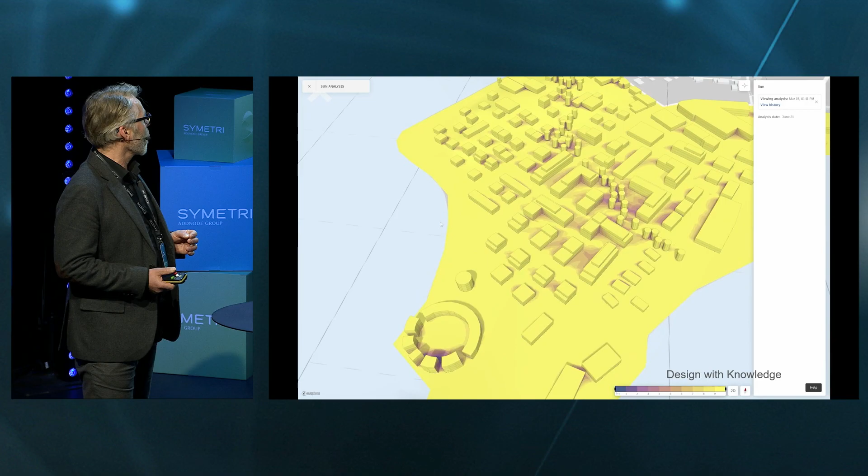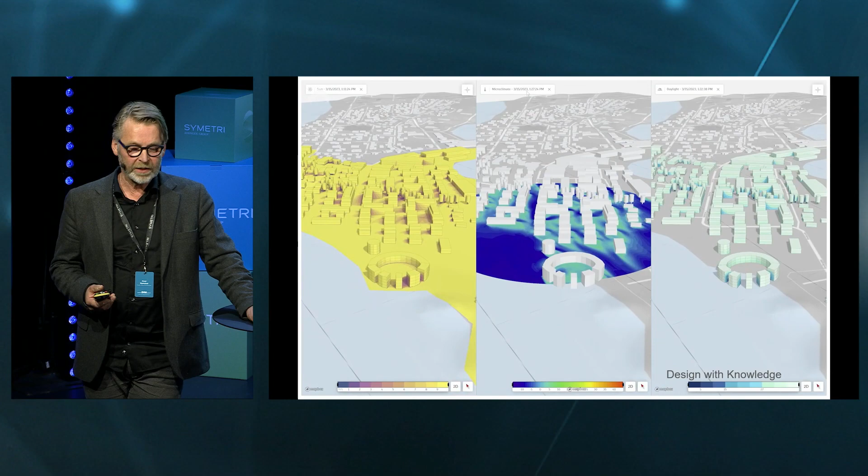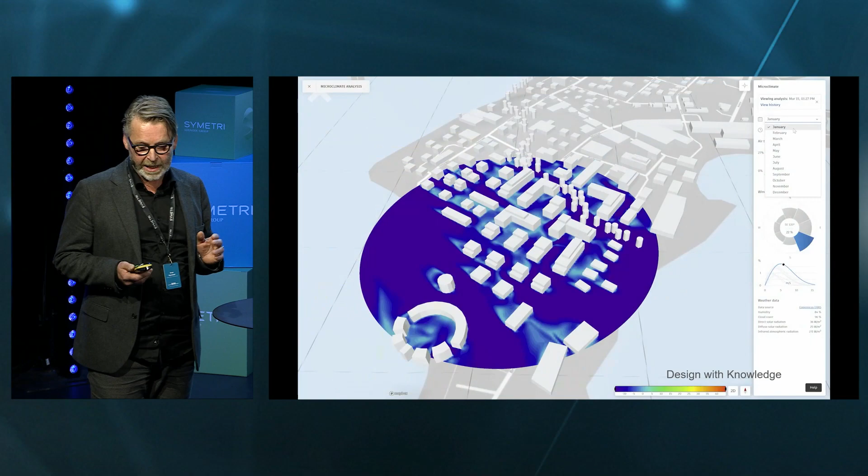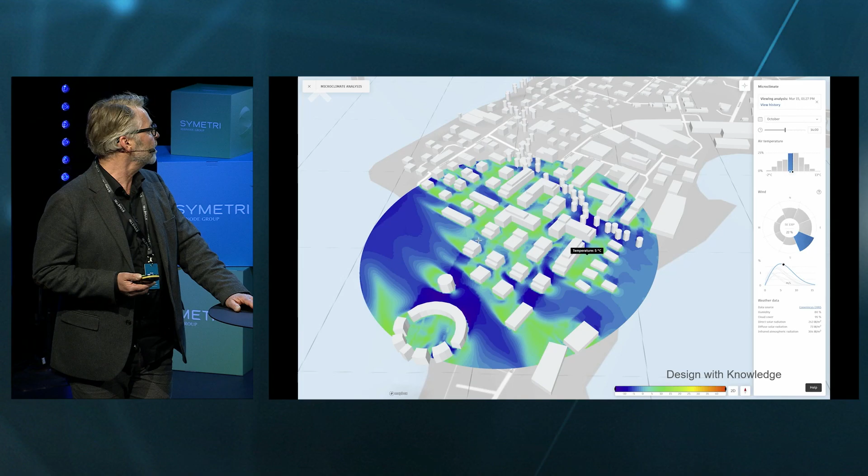Okay, so how do we work? From early phase, we believe in design with knowledge. In recent years, we've got access to intuitive and powerful tools that enable us to investigate the potential of a site. We've been using SpaceMaker for a couple of years to really get deeply into the potential of different sites. Being able to study different design alternatives on the fly is really powerful, because in the early phase, all the important issues should be addressed.

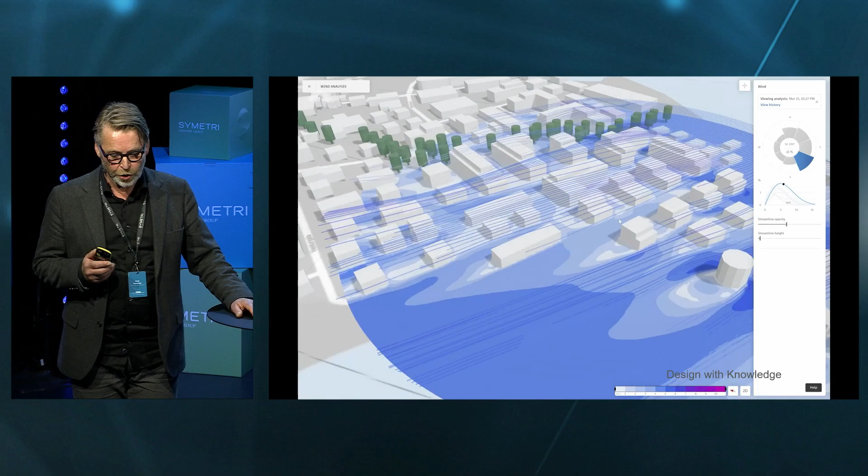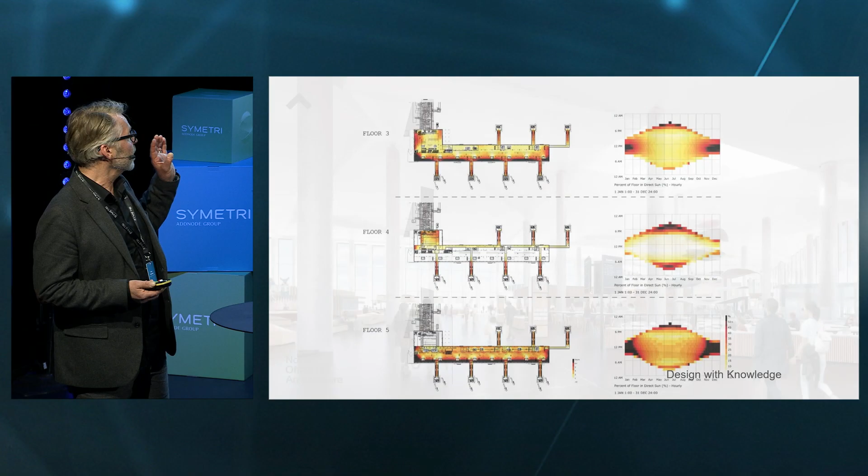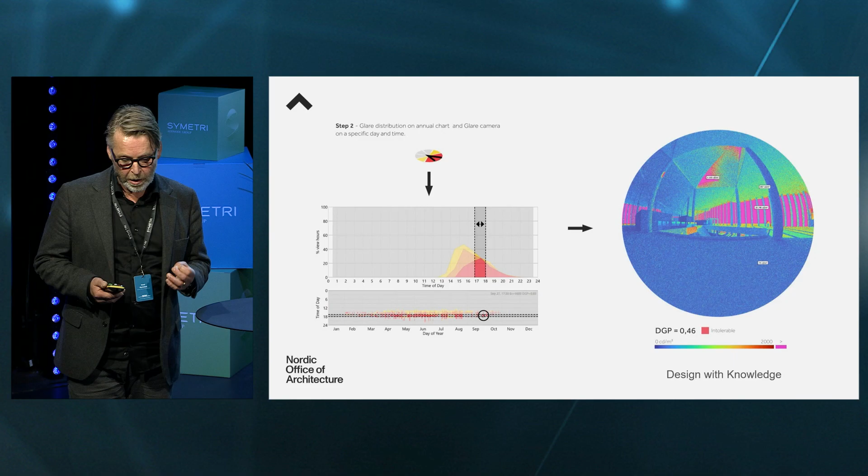We have this SIM group supporting our design teams, and they work with different kinds of advanced simulation as well, not only SpaceMaker, but like daylight studies, glare studies on Keflavik, where we have really powerful tools to go deep into the different design alternatives and evaluate them.

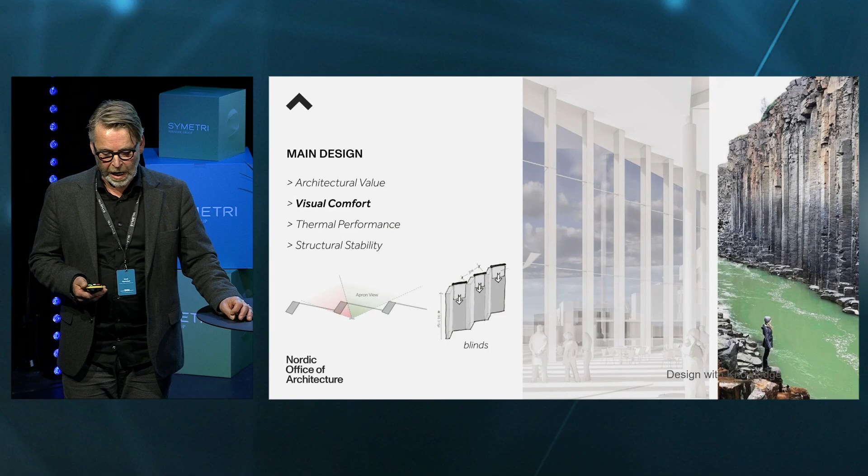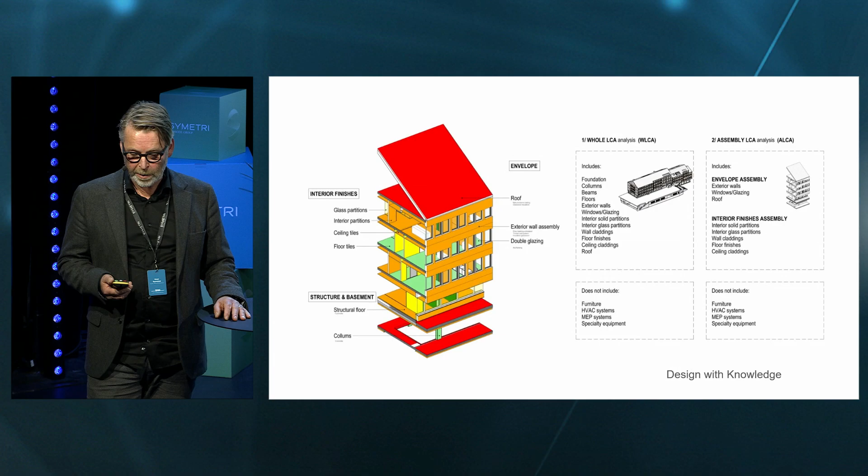We're using Climate Studio, Ladybug tools, and other specialized simulation tools. And this is One Click LCA, which has become a tool now for some of our projects, which is really important to get a grip of the embodied carbon footprint of a building.

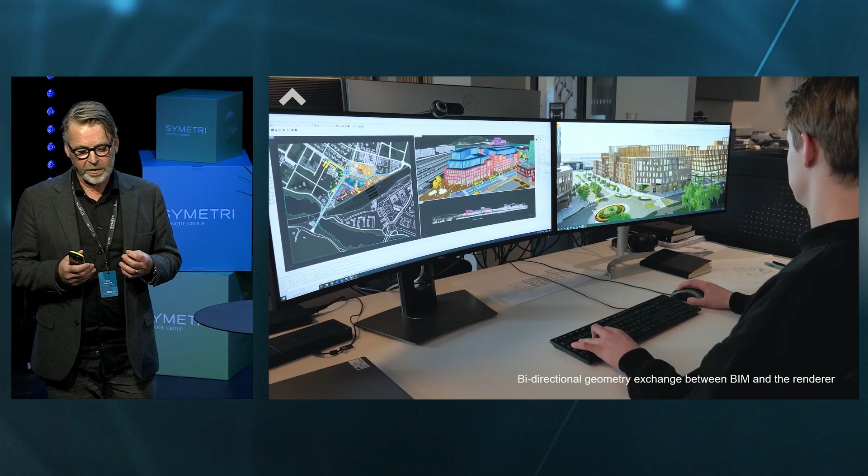There's been a silent revolution out there, and the way these immersive real-time tools are intertwined and linked to the BIM models is a big revolution. We see how this improves collaboration, improves cross-discipline work, and we know the building in and out. Having those tools as standard for many of our architects means you don't need special expertise to do this.

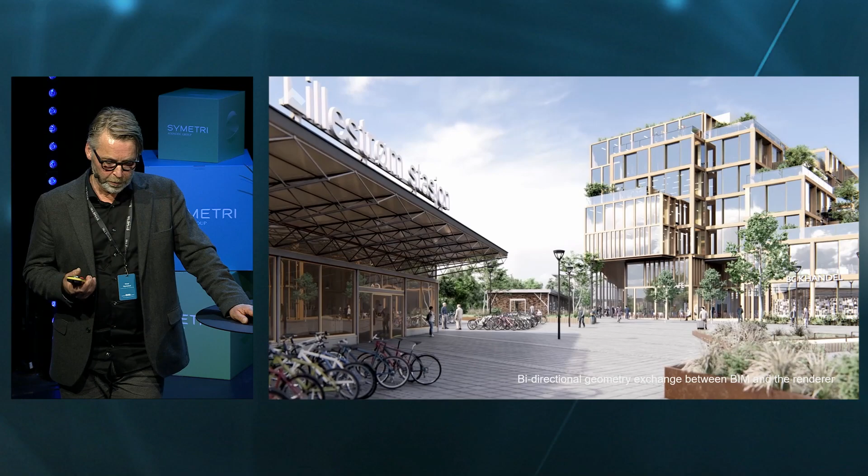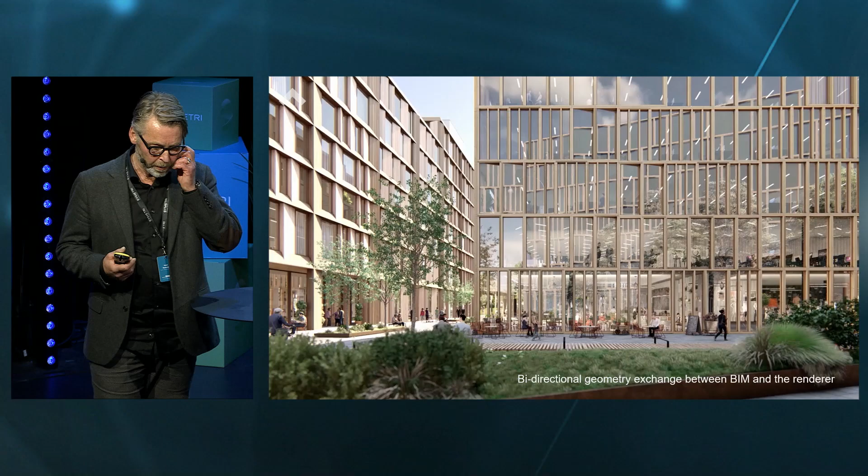So we've been able to produce a lot of visuals, content that we can use in communication with municipalities, like here at Lillestrøm. We will see the enormous power of having updated models. These are not artist's impressions - these are what's on the table for the design team. So we strongly believe in that capability for all the design teams.

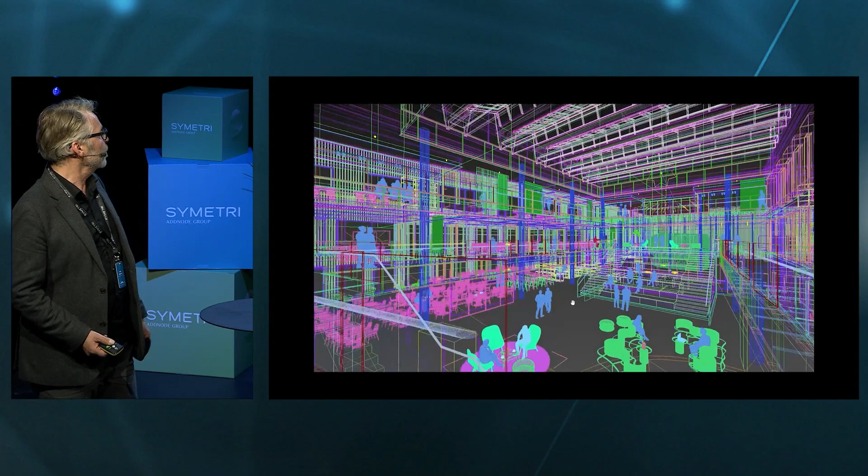And the revolution in computational power, the evolution of GPU, CPU, and cloud-based 3D rendering is enormous. This is real-time Corona rendering, and I'm actually building this image now. So you can sit together with the client and work with the lighting concept, work with the model, which is quite a revolution.

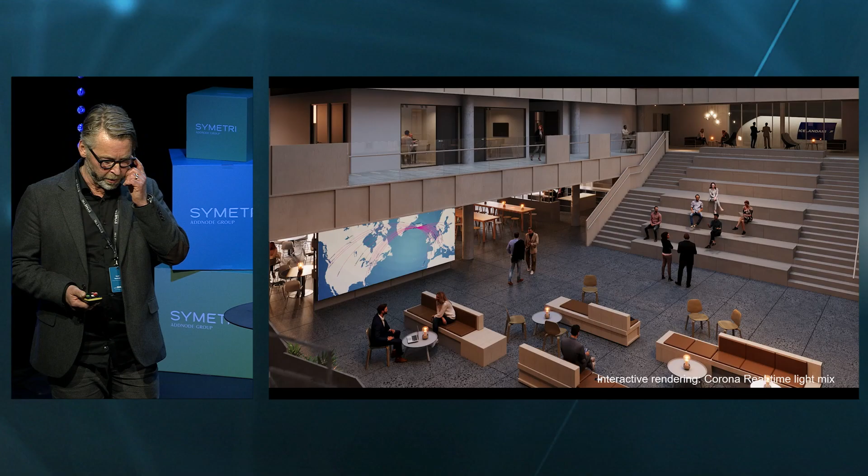And we see that the quality of the architecture is improving because we know the building so well, and we have complete availability to all the different aspects. We are working with immersive VR in quality control. This is the new government quarter, the art integration in the A block. And by using this in cross-discipline collaboration...

Everyone, regardless of background, has a sense of scale, dimensions, sightlines, architectural quality, orientation, spatial relationship, and they see this in a quality not seen before.

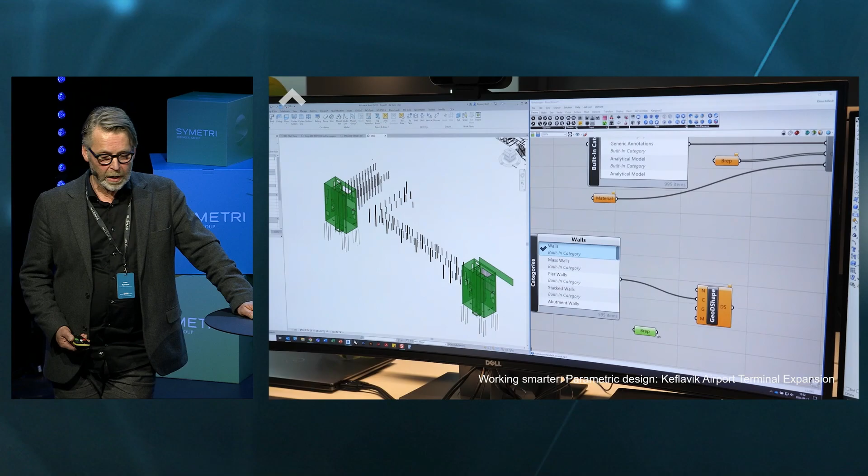We also do a lot of development of tools. We're trying to work smarter in every new project. We define new ways of working. We have been collaborating with different developers like Spacemaker and Parallelo, among others. And we also have a very strong relationship with our parent company developers from Norconsult.

So how do we invite our clients and users into this? We are experimenting with AR now in an infill project in Møllergata. We strongly believe in that technology.

We also strongly believe in the way we can invite users and different stakeholders. This is Stavanger Universitetssykehus with a VR cave. We see that these tools enable us to facilitate the user process in a much better way because everyone sees the exact same thing and everyone is included.

We also experiment now with having kids into the discussions so that we can communicate and allow for feedback from user groups that are normally not heard.

And obviously we're doing animations, old school animations to describe the quality, the architectural quality of the project. This is a new government quarter. We're doing everything in-house, especially in projects like this. So these are actually depicting the project as is.

So, Bridget, now we're going to go deeper into how we can work and how we should work, and dream a little. Thanks, Knut. So we've heard a little bit about the industry problems and how Nordic and its digital strategy is trying to tackle some of these.

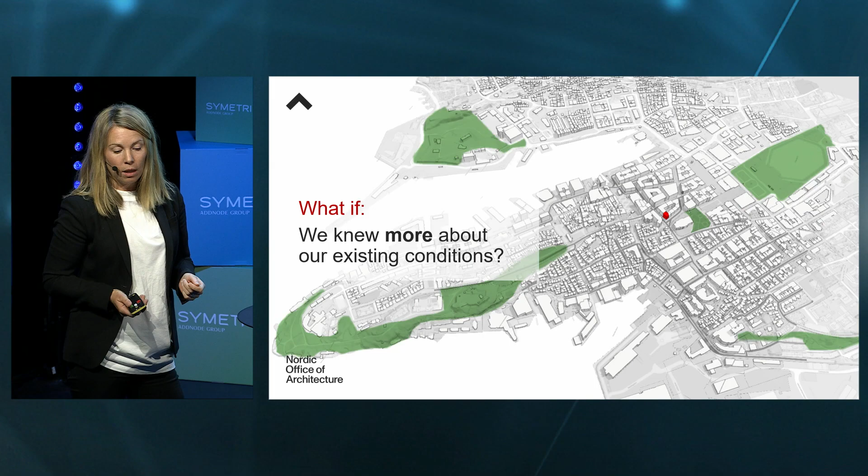So what if, in our workflows, we knew more about our existing conditions? I'm talking about the connection of external data into our digitalized existing conditions and our native design environments. Here, we can understand the wider context with data that's already being produced, such as amenities, educational facilities, transportation, green spaces, demographics, or the availability of reuse elements in demolition or rehabilitation projects. And this is all in our native design environment, putting the tools in the architect's hands.

Some really nice advances in technology or initiatives here include the Bodø Kommune with their digital twin, a visualization of data in a twin environment; Nordeca, who are collecting and visualizing a lot of really nice data; Material Mapper, and also harvesting information from Google Maps. If we could customize this information for our own projects, this would benefit us in understanding where we are in a wider situation.

And what if we could have contextual presentation illustrations produced simultaneously? There would be a closer tie between production and visualization, whereas here it is completely disjointed.

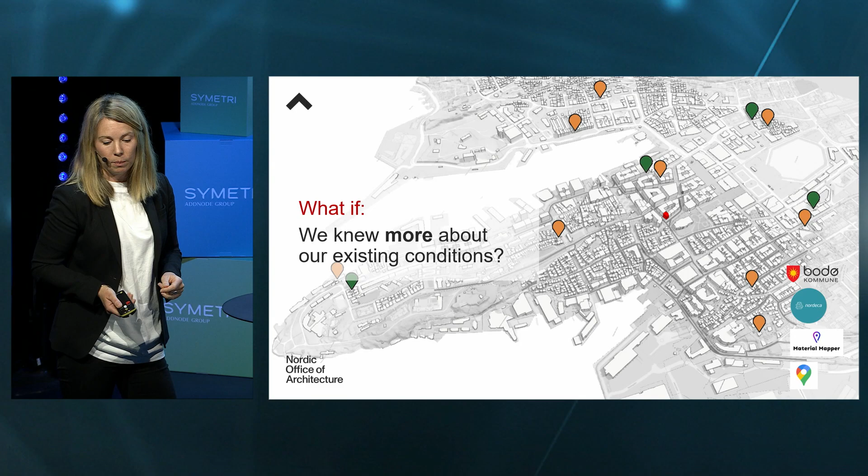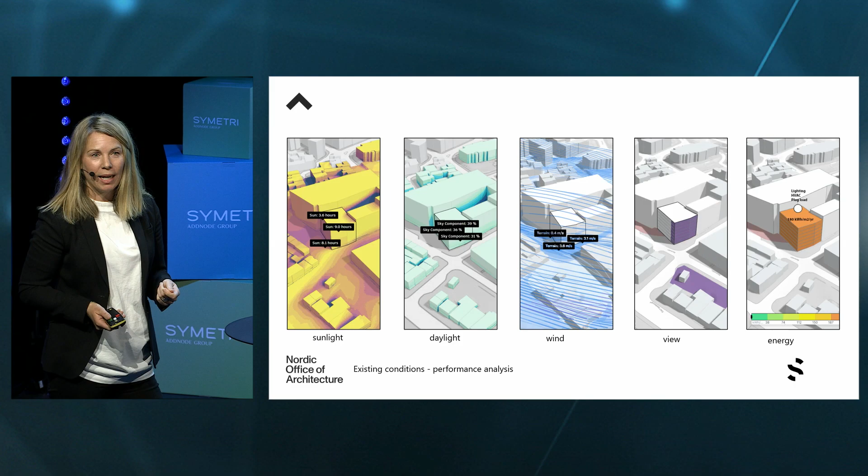So what if we had a better baseline of existing performance analysis? The same as Knut has shown, but in every project. We need an easy interface, visual feedback, such as SpaceMaker for simulations. This could give us a better chance to make performance-related design decisions in early phases. We're more likely to retain and improve more of the existing and improve the rest. So we know the performance of what is there. Commonly, these projects are demolished without analysis.

What if in our early phase workflows, we had the accurate digitalization of the existing conditions? This sounds really trivial. Point cloud technology is not new, but it's still not being done in many of our projects because we come in too late to influence either the development or the purchasing of the point cloud. What if we could have a scanned data bank which made it easier for us to harvest this information rather than having to order new point clouds all the time?

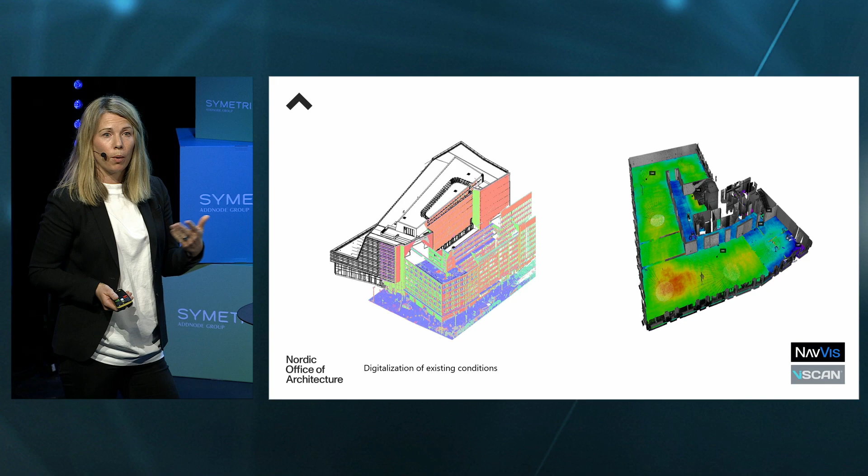And not only having the point cloud, but actually analyzing it so that we know the existing conditions. Let technology tell us about the data. Even better, let's let AI automate the creation of existing geometry. These tasks are taking us away from our design work, and some really nice advancements here are with NavVis and VSCAN in the automation of geometry from point cloud.

I'm really happy to have an expert in my team because this technology is new for us, but it's so essential that we understand what we're getting.

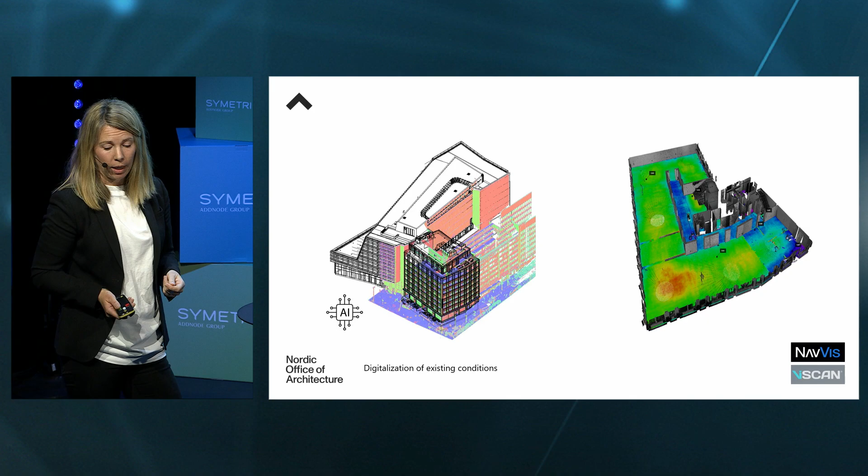The mandatory mapping of elements for reuse is coming, but what if we digitalized it much earlier on in both rehabilitation and demolition projects? And it could be data or data and geometry. Here, we could either feed that back into a system by donating it or absorbing it in our own projects. Then we could make design decisions based on the availability of resources. We're happy to be working with Materia and Twin Solutions, some really nice advancements in technology here. So we're really excited.

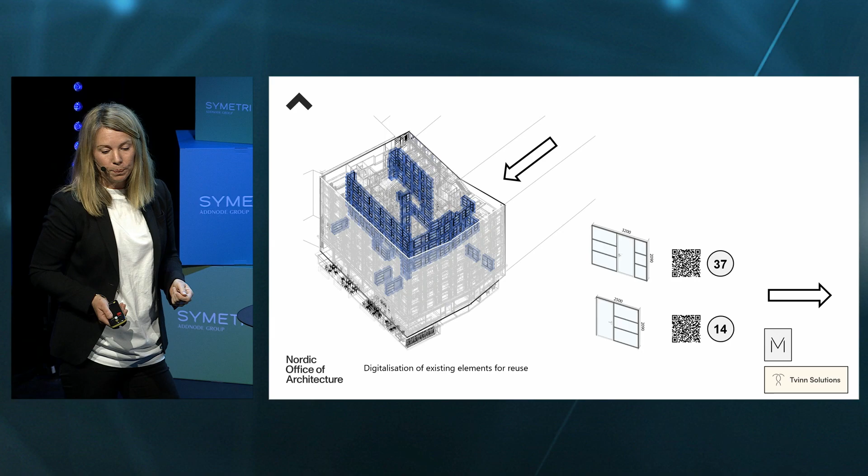What if we knew more about our designs themselves? In my dream, we have technology that automates monotonous and repetitive tasks, and we have more time to understand and optimize our own designs earlier.

We've got the clients on board that evaluate more than just cost and program. And here, with a connection of data such as EPDs, material passports, price, locality, reuse elements, or the use of algorithms to calculate waste, this would all be available in our native environment. So it would allow us to pull data from wherever we needed and optimize or assess our designs in a way that we're not doing right now.

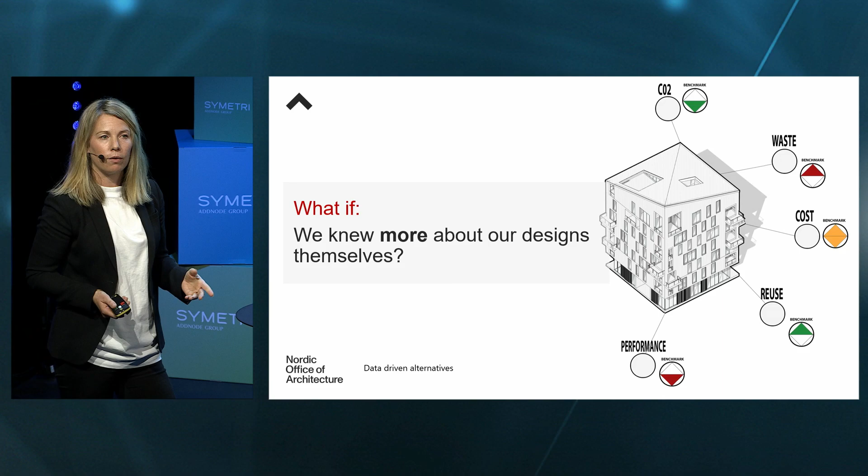When we talk to contractors, they tell us that they come in too late to influence the choice of materials or the amount of waste created from our configurations. But what if we brought them in earlier in a consultant-based role? They know a lot about waste, but we're not using any of this in our early phase design environment.

Here, we're relying on structured data, visual feedback, and the ability to compare. It needs to be user-friendly for all architects, and we're hoping that these new workflows could avoid greenwashing, which happens in later phases.

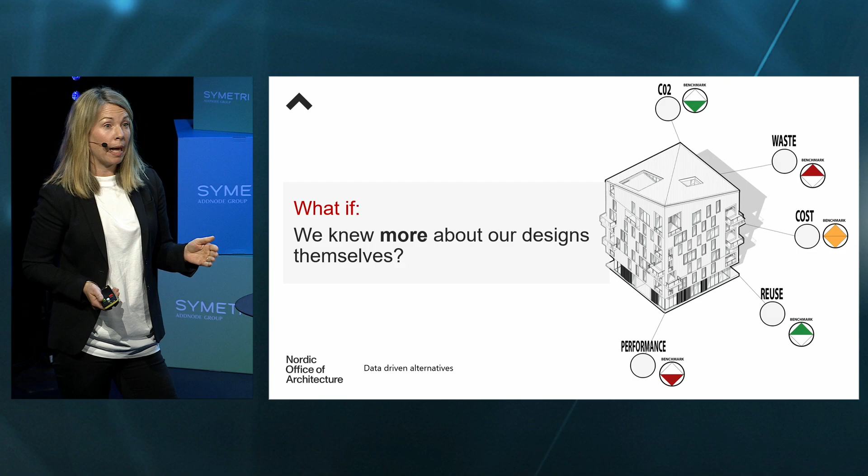So what if we understood the impact of every project? Raise the bar a little, just to get started. This connection of data could allow us to have impact as an active factor in the evaluation of our design alternatives. For example, the total CO2 emissions.

And what if it was done even if it wasn't asked for, because it was so simple and convincing? We as architects could become the drivers for projects with a lower impact. We're so happy to have Norconsult on our team, who have developed an early phase connection to CO2 information, which is super easy and visual if we create the right filters, and one-click LCA for the later phases.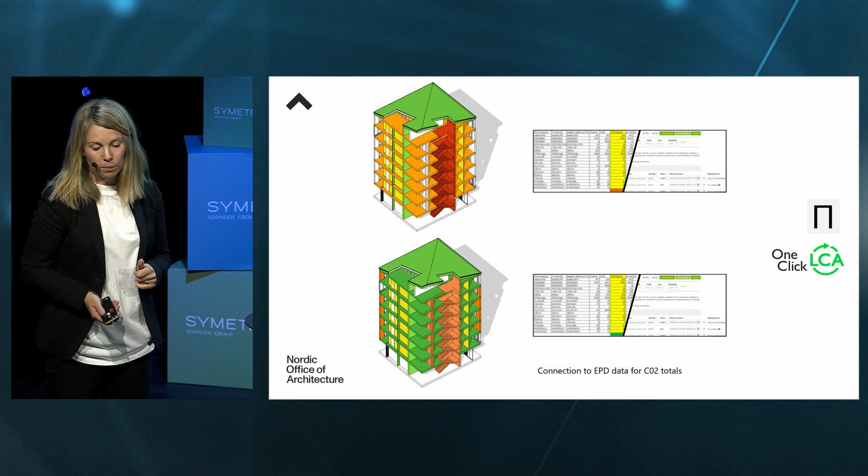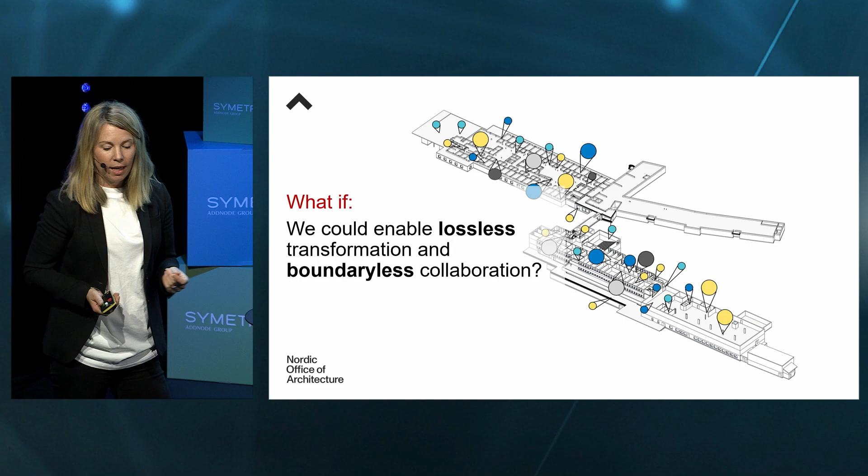What if we could enable lossless transformation and boundaryless collaboration? What if the project environment could be a smooth series of handshakes and high fives, that there was actually one source of truth? What if we could use technology to facilitate better digital cross-discipline collaboration? And I'm not talking about separate files as links, but the transformation of geometry and data. Importing and exporting would become obsolete, and all types of data could be harvested: documentation, imagery, status.

It was really interesting hearing from Teo. I'm excited about the way Autodesk is going too. So yeah, the industry is headed in the right direction, but it still feels like the era of the workaround. And I encourage you to visit my colleague Christina's presentation tomorrow. She's going to talk about a project that advanced a little in collaboration across the globe.

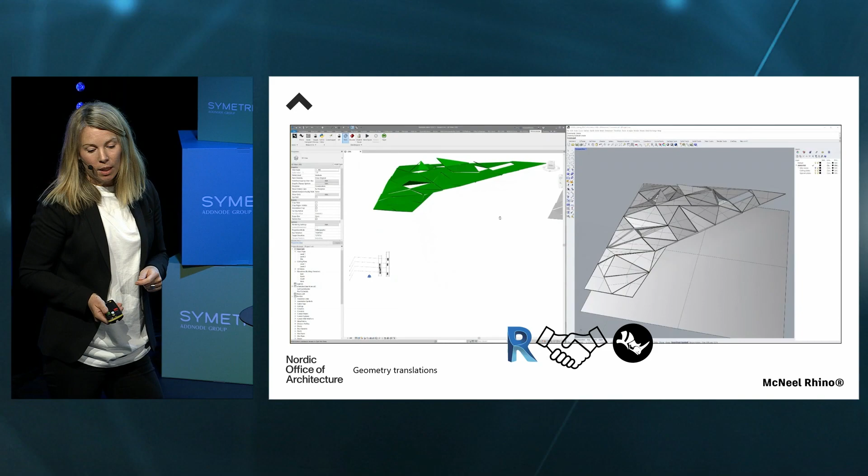So some interesting examples of where the industry is headed in this direction and the lossless transformation of geometry. Here we've got Revit and Rhino operating nicely under Rhino Inside or McNeel Rhino. Architects can use whichever program that they need to achieve the desired design goals without compromising, and one software acts as a host. And this is my clever colleagues that are working on the Keflavik airport.

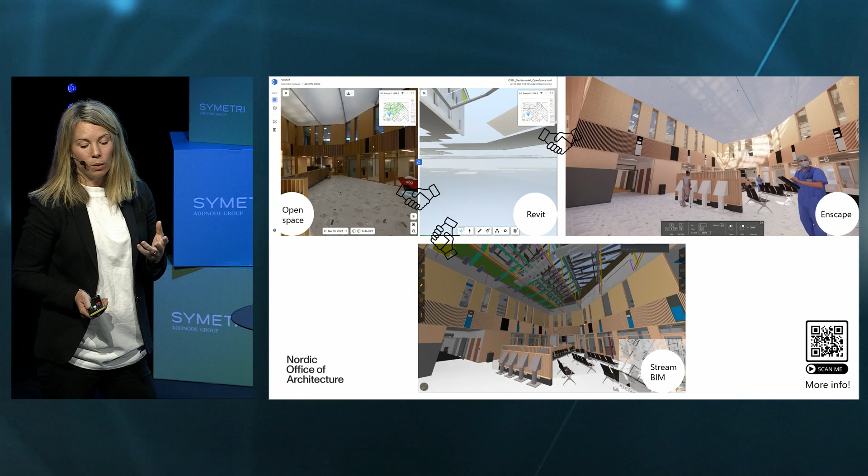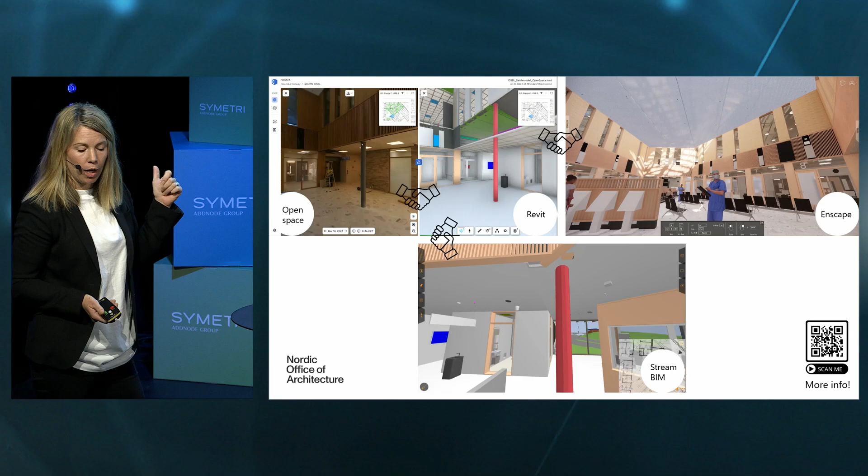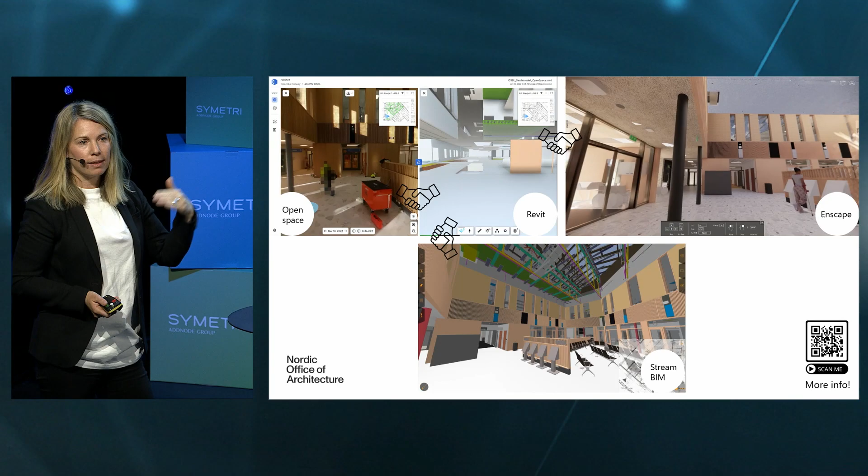Another interesting example is the interoperability of these four softwares in the Oslo Storbylegevakt project. They're using Revit as a native design environment, Stream BIM, which hosts the models and all the data. They're using Enscape for visualization, and OpenSpace for the site photography, which is a really interesting program. It takes imagery on site and connects it back to the BIM model. And it also uses AI to track the status of the building on site, which is really interesting.

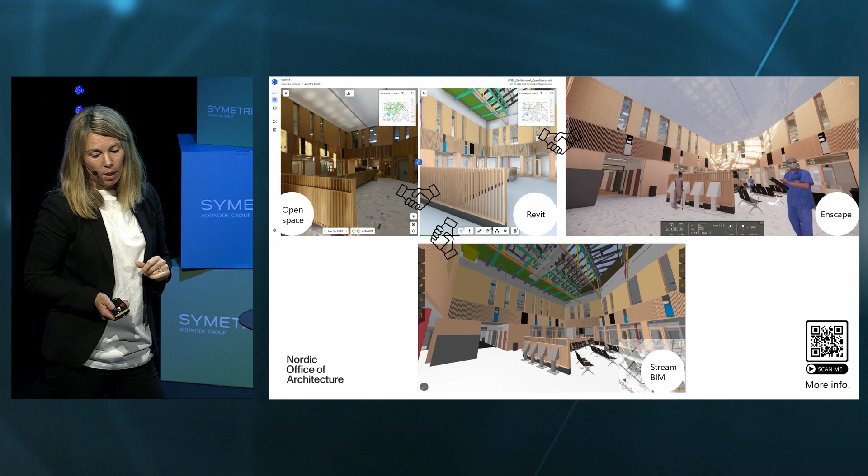But there's still a level of fragmentation in these workflows, but it's much better than the norm. What if we could have all in the same system? Here, there's several exports that create this workflow. It's a really great project to take a look at, so I encourage you to take a picture of the QR code, and there's a nice video that sort of talks a little about their collaboration.

So what if we could design our projects' futures from their pasts? One hot topic here is the digitalization of circularity. But what if we knew what was available, how much, when, where? We're much more likely to incorporate reuse elements in our projects. So if the system was a series of digital handshakes from start to finish, from the extraction to the reuse in the next project, this could enrich the stories of future designs, or it could be a catalyst for design concepts.

A nice example is Empower, that works with the circularity or the digitalization of the circularity of plastic. They actually embed a story in the final products, and you can see where the plastic has come from. And I think that's really rich and really exciting. But if we're going to get this to work, we're relying on collaboration, knowledge sharing, and structured data through the whole value chain.

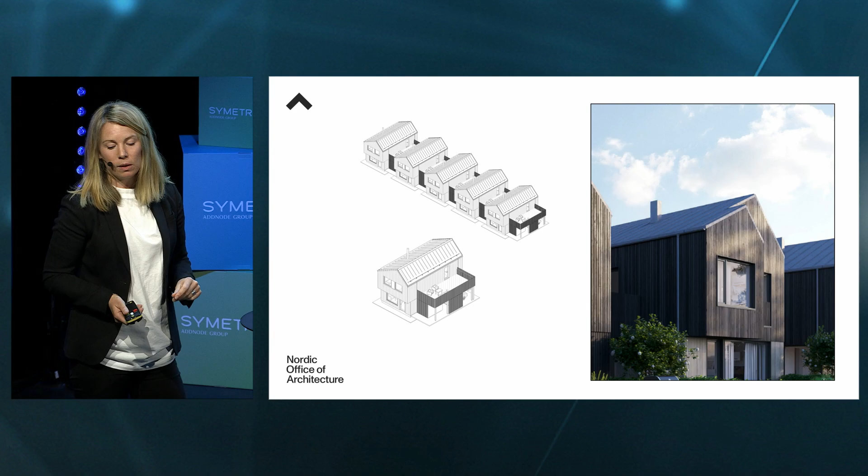What if we go one step further in our new builds for the digitalization of design for disassembly? Here, pulling inspiration from Europe, in our design, we could actually design our project's potential future.

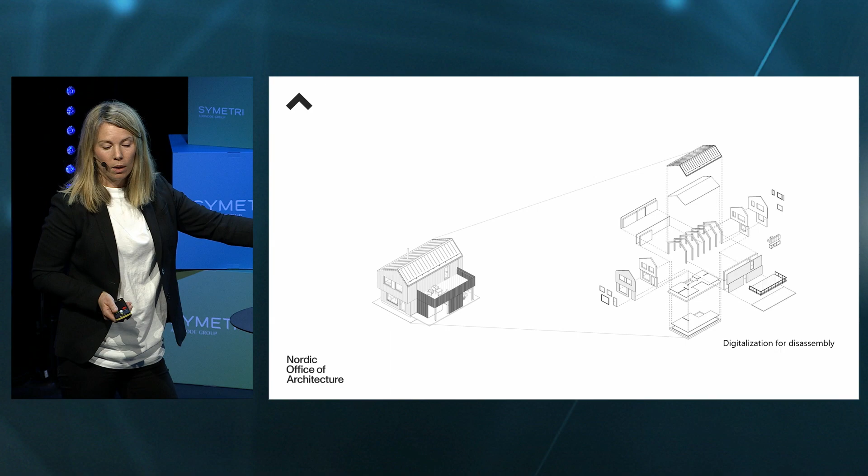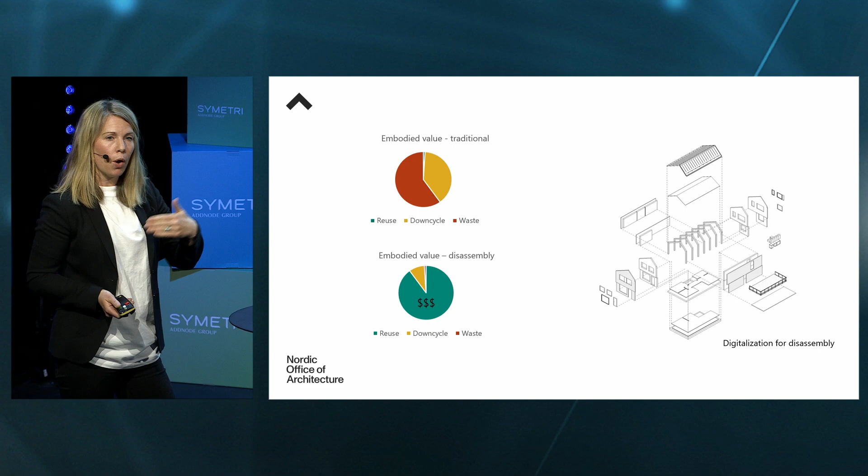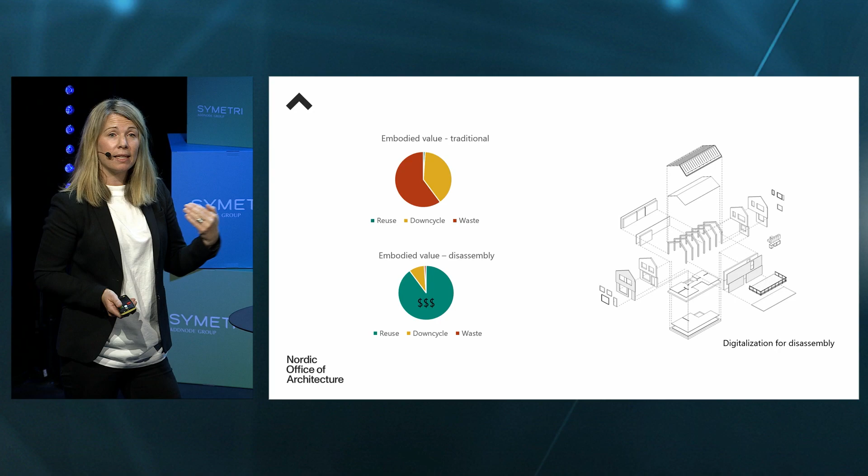So the BIM model would create a standard for full lifecycle contracts, design to disassembly. This can give an embodied value to our clients, which we haven't had before, in the way that if we demolish or rehabilitate, those elements essentially have no monetary value associated. But if we could sell in disassembly, that they actually retain a monetary value in the transformation of a project, we think that would be an incentive for a client to change the way they're thinking about their project.

So, in conclusion, dreams aside for now, there is a lot of uncertainty and fragmentation in the industry and things that we can't control. But if we're going to reach our goals of working the way we believe we should, by increasing circularity, lowering impact, and creating better performing, more informed cross-discipline designs, one thing we at Nordic Office of Architecture are sure of, and that's collaboration is the way forward.